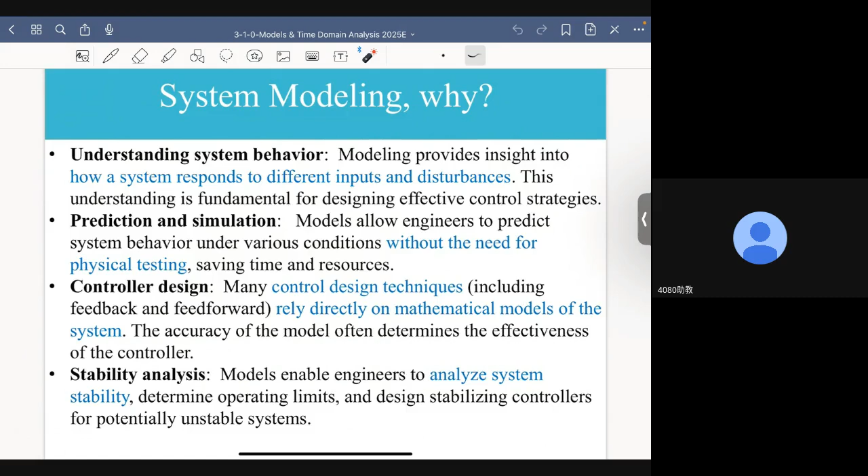The modeling process typically can be divided into 4 phases. The first phase is assumption and hypothesis. We need to make some assumptions to simplify our problem. For example, we'll assume friction is negligible.

For example, we will assume that many effects, which in reality are nonlinear, but sometimes we can reasonably assume under some operating conditions, a system can be considered to be linear. Of course, these assumptions and hypotheses need to be tested.

So once we make those assumptions, typically based on some physical laws, we can perform mathematical formulations. That is, we can set up a set of, sometimes a single, differential equations to represent the system. As we said many times, the differential equation itself represents the system.

The forcing function of the differential equation represents the input, and the solution of this differential equation represents the output. So we need to solve the differential equation. Once we have the solution of the differential equations, what we have is prediction of the output variable of the control system.

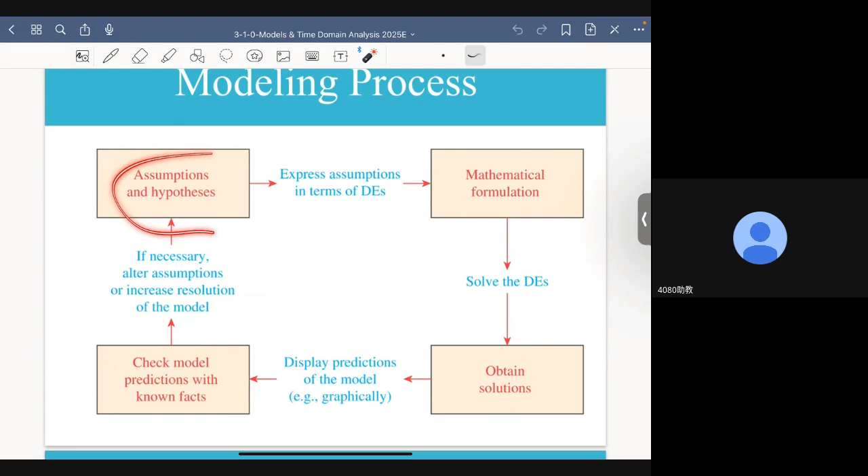Otherwise, I probably have to go back to examine my assumptions and hypotheses, and if necessary, increase resolution of the model, which means I have to add more details into the model so that my model can be more reliable and more accurate. So what is the mathematical model in this course?

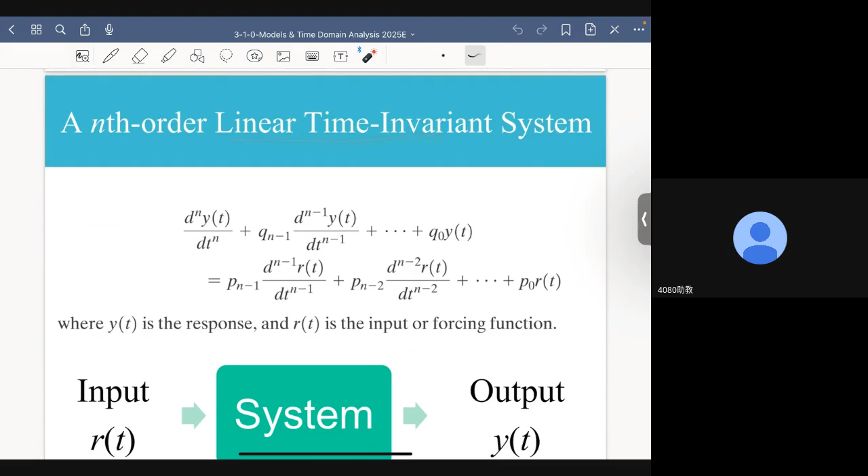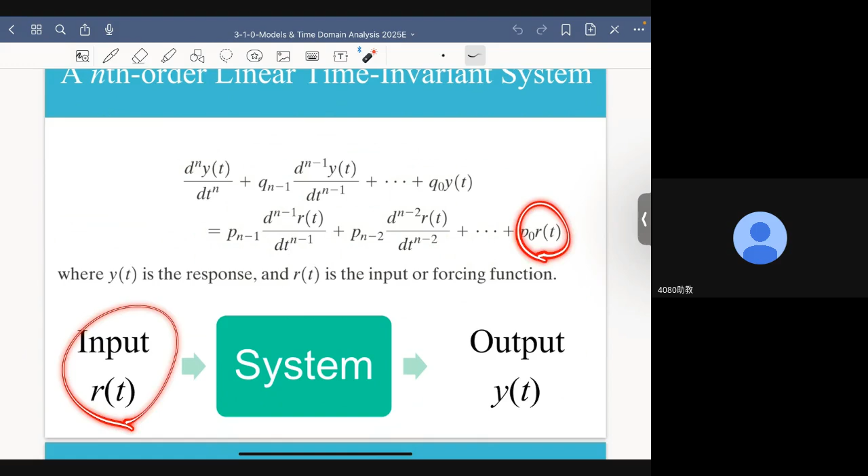As we said many times in this course, we considered nth order linear time invariant continuous time systems. Such a system can always be represented by this differential equation. These coefficients are all constants, none of them can be a function of time. If all these coefficients are constant, then this is a time invariant system. The forcing function represents the input, and the solution of the differential equation is the output.

The voltage drop across the capacitor is 1 over C times Q, where Q is the charge. And the voltage drop across the inductor is L times the derivative of the current.

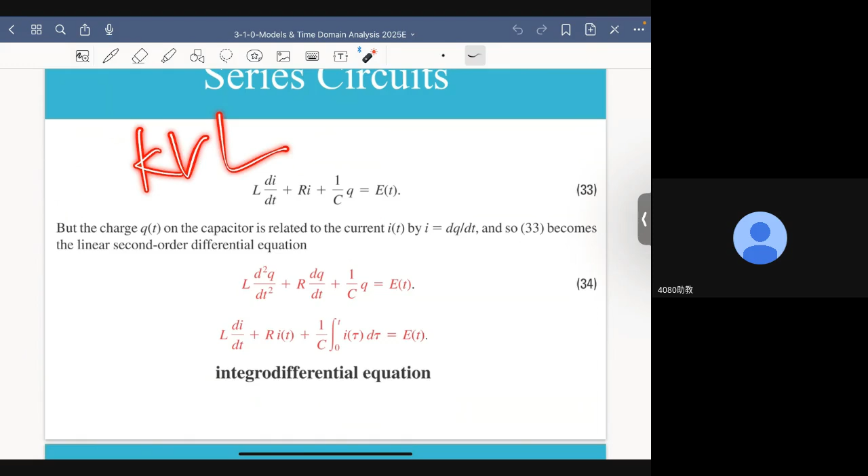Based on the KVL law, we know that this voltage source should be equal to the voltage drops across these three elements. Therefore, we have this differential equation. The problem of such a representation is that we have two dependent variables: one is I, the other is Q. We know that I is actually the derivative of Q, that is, current is the derivative of charge. So we can rewrite this equation using this equality.

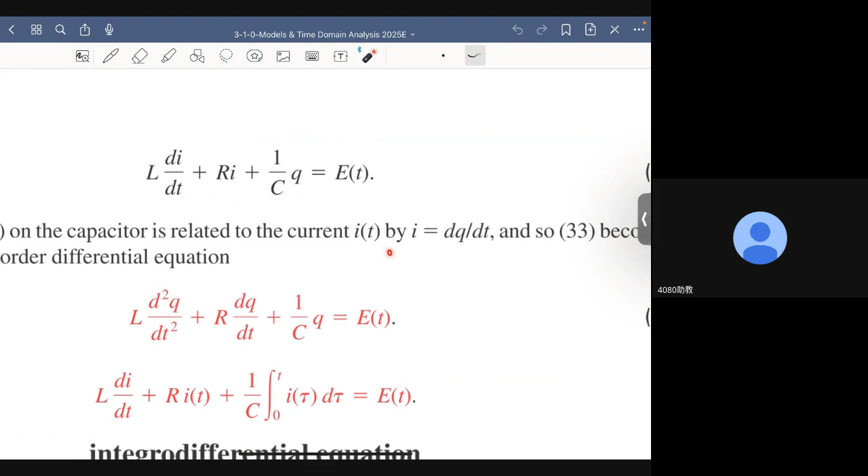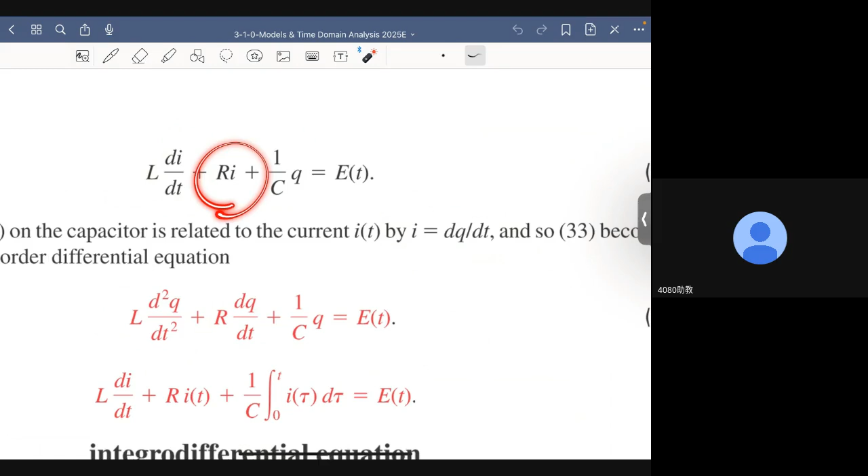For example, the derivative of the current can be rewritten as the double derivative of the charge. We can apply the same technique to rewrite this term, so Ri now becomes R times the derivative of Q. So what we have here is, of course, a second order differential equation, and it's a linear time invariant system because all these three parameters are constants.

Now, if you are not happy with this representation, that is, if you think the dependent variable should not be charge but should be the current, what you can do is replace Q by the integral of the current. And this differential equation can be written as this equality.

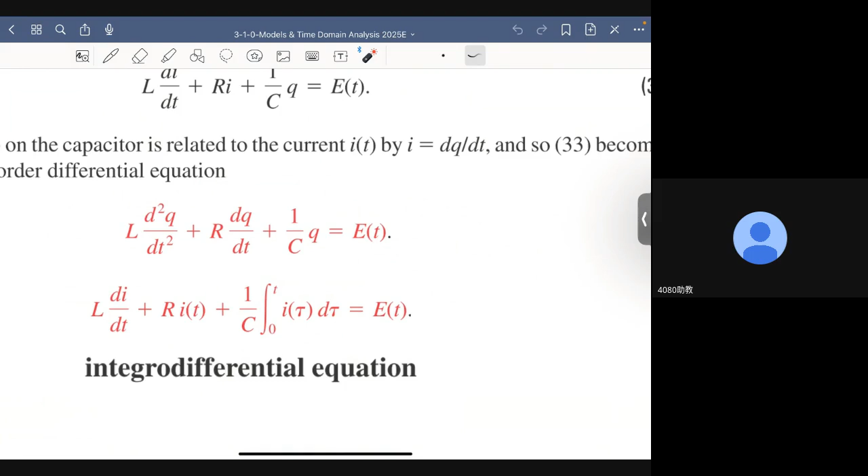The problem of this equation is that you have derivative and integral at the same time, so mathematically it's more tedious to deal with such an equation. This kind of equation, which involves derivative and integral at the same time, is referred to as an integrodifferential equation. But typically we don't want to deal with this kind of equation; we prefer a linear second order differential equation, because it is an ideal prototype for control system design.

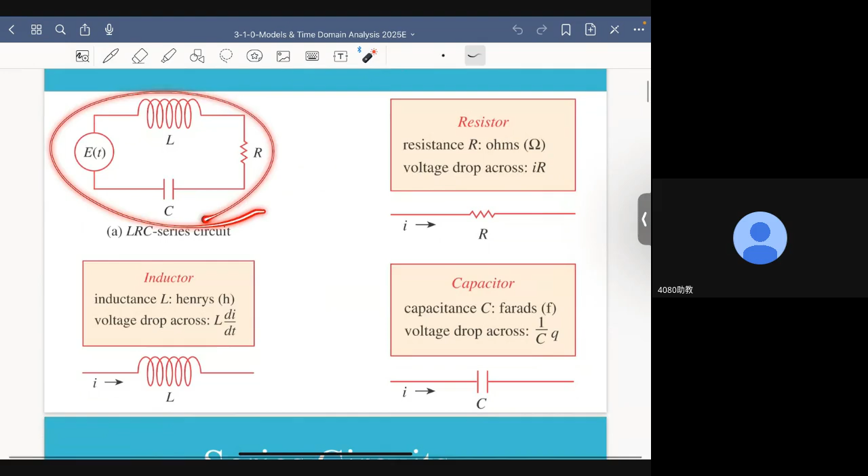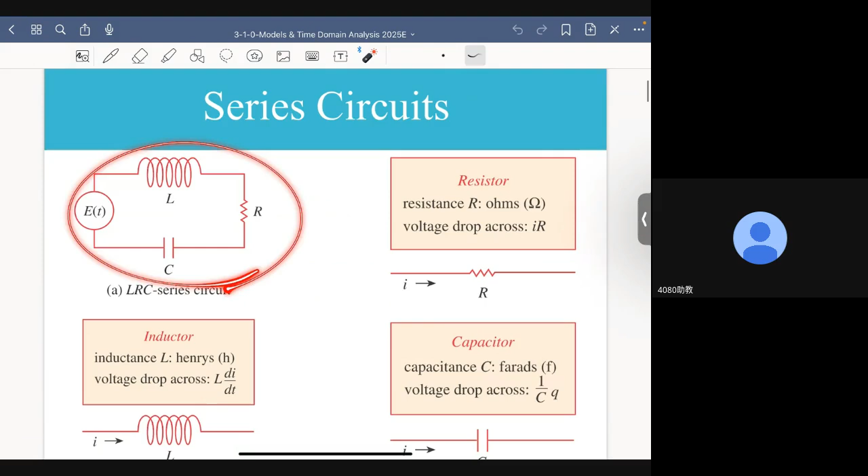Now, what we have done is for this series circuit, we set up a differential equation to represent the behavior or characterize the dynamics of this electric system. We can do pretty much the same thing for a mechanical system. What we have here is called a spring mass damper system. For example, a mechanical suspension system is made of, for each wheel, such a spring mass damper device. So to set up an equation of motion for this device, we need to use a technique.

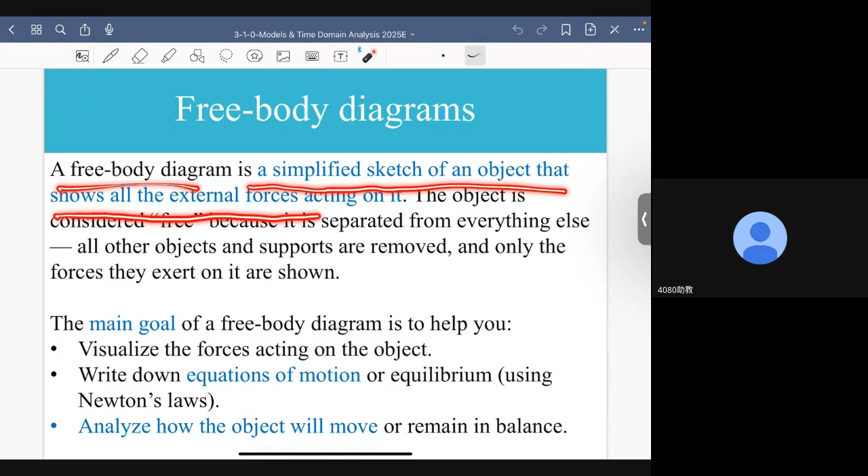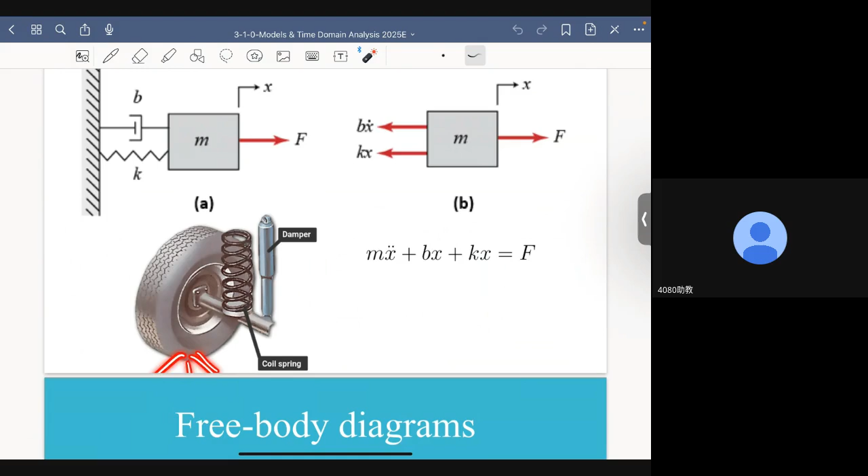The first thing we need to do is draw a free body diagram. What is a free body diagram? You learned that before, but let me review the idea again. A free body diagram is a simplified sketch of the object that shows all the external forces acting on it. So mass is the object, and what external forces do we have here? We have three external forces. The first external force is the force we apply to this mass, for example, the ground reaction force applied to the tire can be chosen as F.

Now there are two other external forces. The first is the spring force, and we know from Hooke's law that spring force is proportional to the deformation of the spring. The proportionality constant here is K, which is the stiffness or spring constant of the spring. Now the final external force is the damping force, which comes from the damper. This force is proportional to the velocity.

The spring force is proportional to the displacement of the object. By contrast, the damping force is proportional to the velocity of the mass.

For example, imagine yourself standing quietly, standing still in the sea. Without any movement, you won't feel any resistance. But once you start to move, you feel resistance from the water. And the faster you want to move, the higher the resistance. That's damping force.

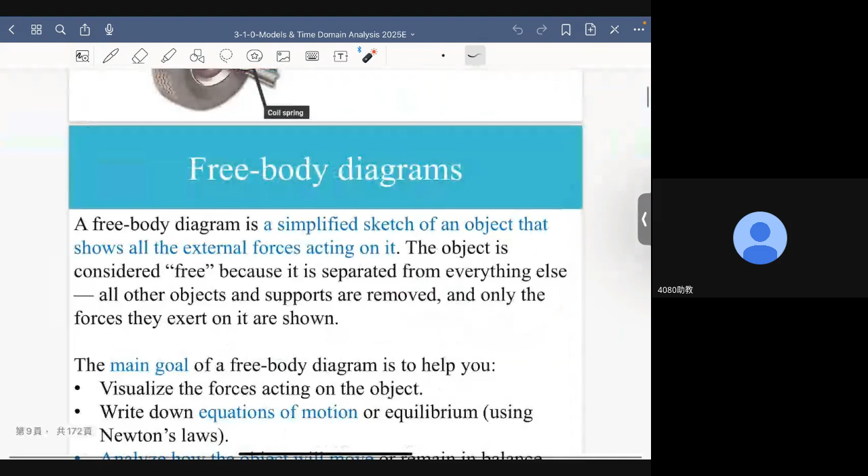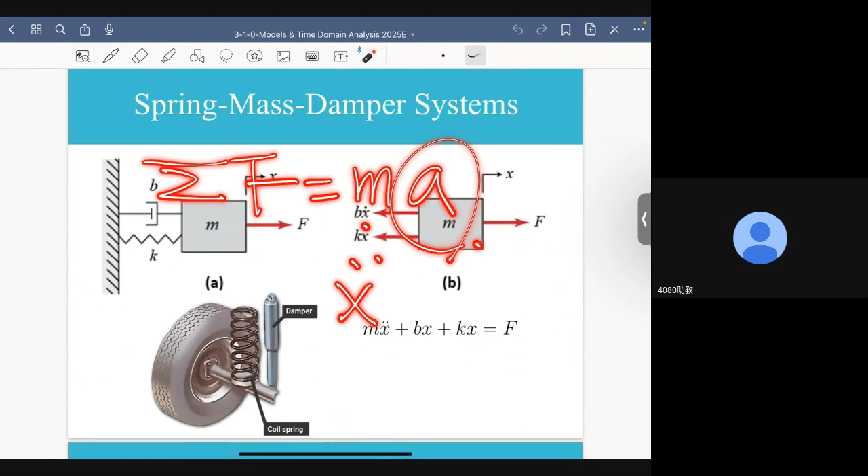So with such a free body diagram, we can use Newton mechanics to set up the equation of motion for this spring mass damper system. How do we do that? According to Newton mechanics, what we have here is summation F equal to ma. M, of course, is the mass. A is the acceleration, which can be rewritten as x double dot. And what are the forces? Of course, F minus bx dot minus kx.

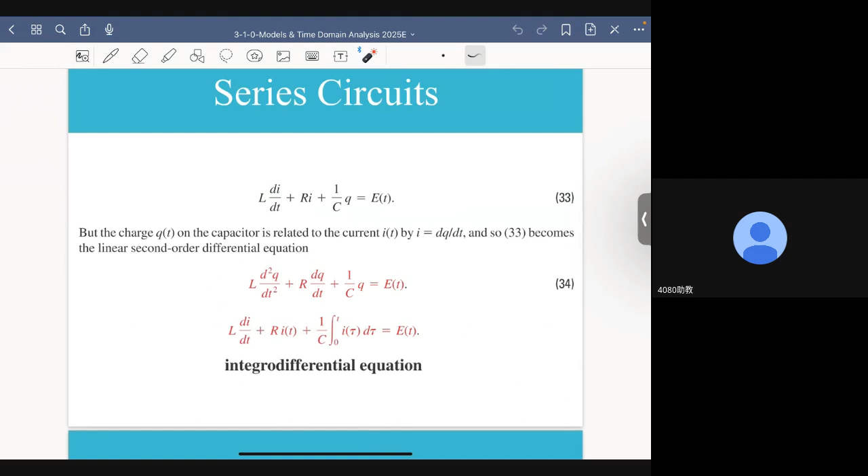By rearranging the order of these terms, we can finally come up with this equation of motion. Again, it is a second order linear time invariant system, similar to what we have here. Physically, they represent different hardware, but mathematically, they are all represented by second order linear differential equations.

So spring mass damper systems are actually very important in control, because it is fundamental in control engineering. It is the simplest dynamic model that captures essential effects of inertia, stiffness, and damping. The effect of inertia comes from the mass, stiffness comes from the spring, and damping comes from the damper. As a result, this makes it a universal prototype for many real-world systems.

If you want to study a system, probably one of the best ideas is to model it as a second-order differential equation and to understand the physical meaning of how that system performs, how the parameters correlate with the actual behavior. You can think of that second order system as a spring mass damper system, and consider its behavior in terms of inertia, stiffness, and damping, because these three terms all have very straightforward, easy to understand physical meanings.

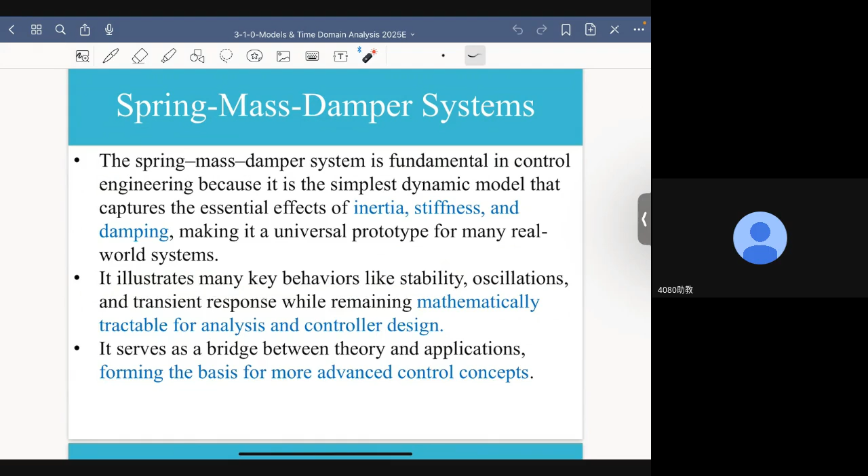In the course of engineering mathematics, we have already learned a bunch of mathematical techniques that tell us how to solve those equations, how to deal with them. So second order systems such as spring mass damper systems are mathematically tractable, so it's relatively easy to study by maths. Therefore, it serves as a bridge between theory and application, forming the basis for more advanced control concepts.

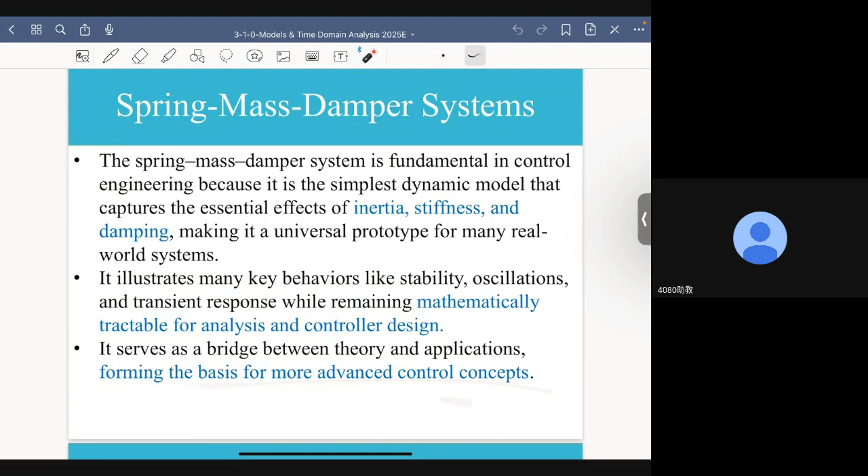That is, in the real world, there are many systems which are much more complicated than a spring mass damper system. For example, a spring mass damper system, as we already know, is a second order system. You may have to deal with higher order systems, but even under those circumstances, second order systems still represent the basis for dealing with those advanced control systems.

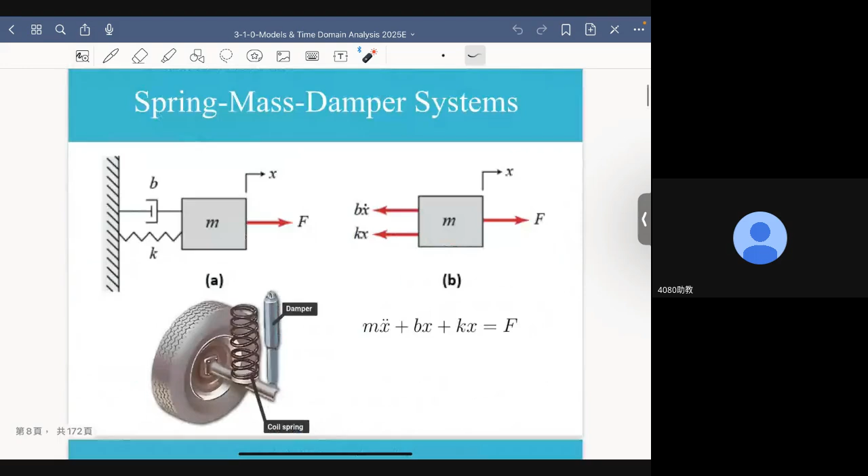Now, here I want to introduce an idea called analogous systems. This is a series circuit, and this is the spring mass system we just talked about. Both of them can be represented by second order differential equations, so they are therefore analogous systems, because analogous systems refer to systems from different physical domains. For example, from the electric domain or from the mechanical domain. It can also come from thermal or fluid systems. Although they come from different physical domains, they exhibit mathematically similar behaviors. Physics different, but in terms of maths, they are basically the same.

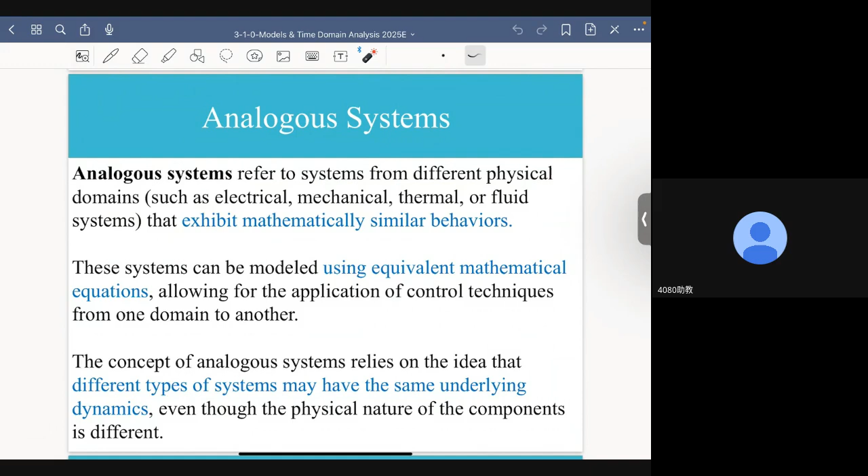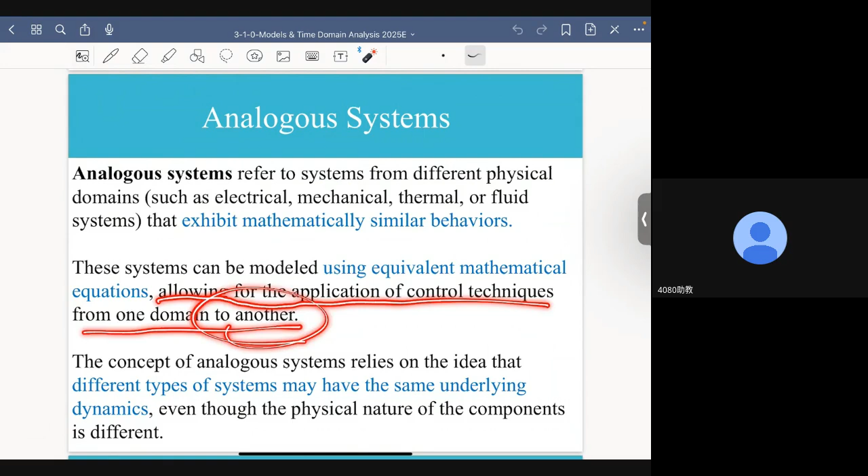If that is the case, we can call them analogous systems. This system can be modeled using equivalent mathematical equations, therefore allowing for the application of control techniques from one domain to the other. For example, if you want to perform experimental studies for these two systems, conducting studies for this system is much more complex than performing an experiment with such a simple circuit. Putting a series circuit together, I wouldn't say is a piece of cake, but it's really not that difficult, because all these elements are easily commercially available.

Connecting these elements together is also not a big deal. You can use simple devices to measure the current, the voltage drops of this circuit. But performing experiments for this system is much more complex because it involves mechanical elements, and you need expensive, sophisticated sensors to measure acceleration, velocity, and displacement. So it's not an easy job.

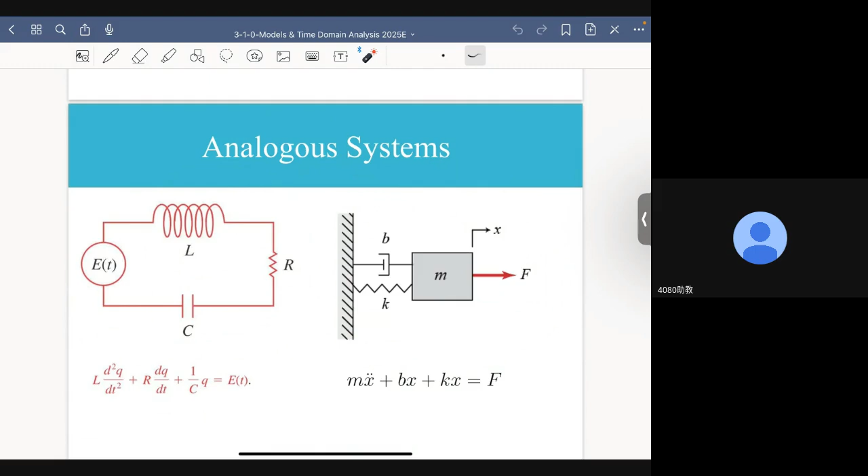But if they are identical in the sense of mathematics—let's say if you pick the right elements—then the differential equation of this model can be identical to the differential equation of that model. Then any experimental results obtained from this model can be applied to this system. Why? Because although they are physically different, they are mathematically equivalent. That's the idea of analogous systems.

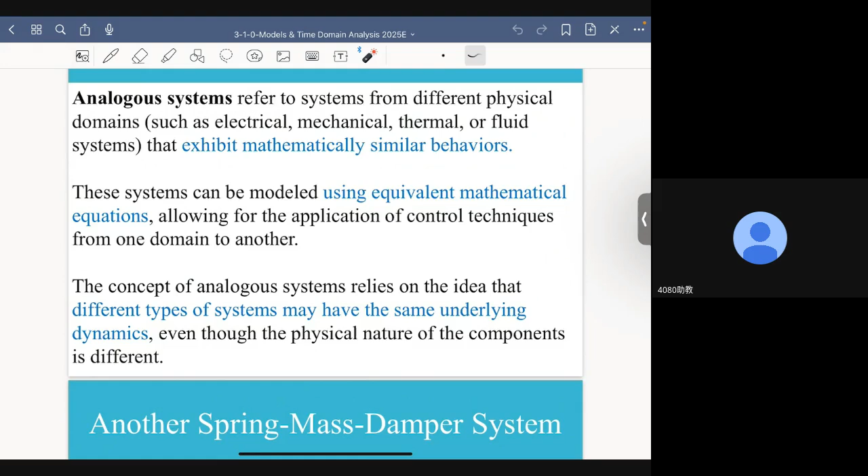Because they have equivalent mathematical equations, the concept of analogous systems relies on the idea that different types of systems may have the same underlying dynamics. Therefore, the result from one system can be readily generalized to another system, as long as these two systems are analogous. Let me give you another spring mass damper system.

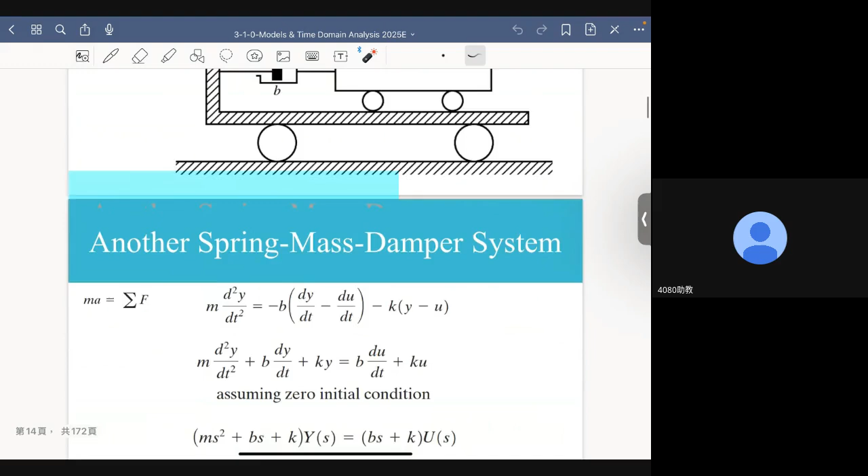Here we have a spring mass damper system we saw before, but now they are attached to the wall of a moving cart. I assume it is a massless cart, so the mass of this cart can be ignored. Now, by drawing a free body diagram of this mass, and by applying Newton's mechanics, I have these equalities.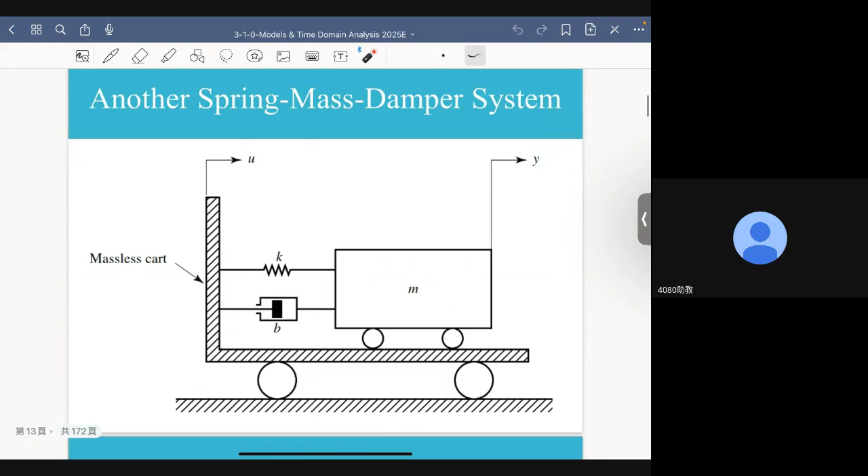This represents ma, and this represents the damping force, which is proportional to the velocity. Here the velocity is not the absolute velocity of this mass, but the relative velocity between this cart and this mass. Similarly, the deformation of the spring is actually the difference between y and u. Therefore, the spring force is not minus ky, but minus k times the difference between y and u.

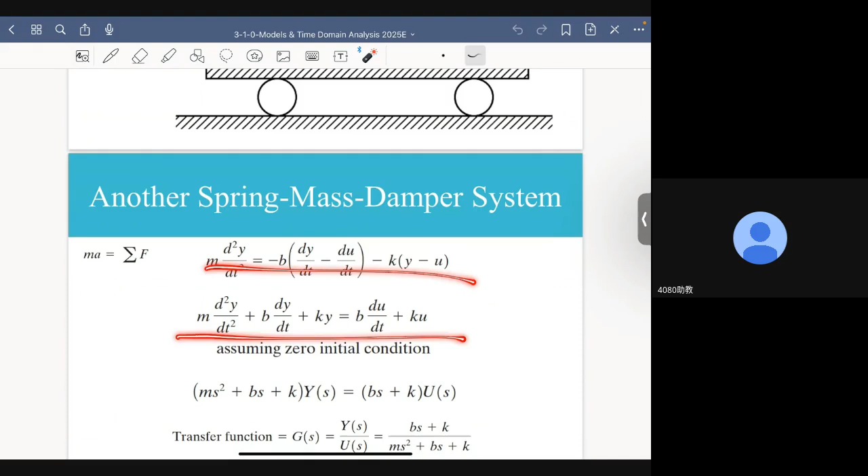By rearranging terms of this equation, we can have this equality. And by taking the Laplace transform of this differential equation, and at the same time assuming zero initial conditions, we can have these algebra equations. I hope this conversion looks very natural to you—it won't be something that looks totally strange to you.

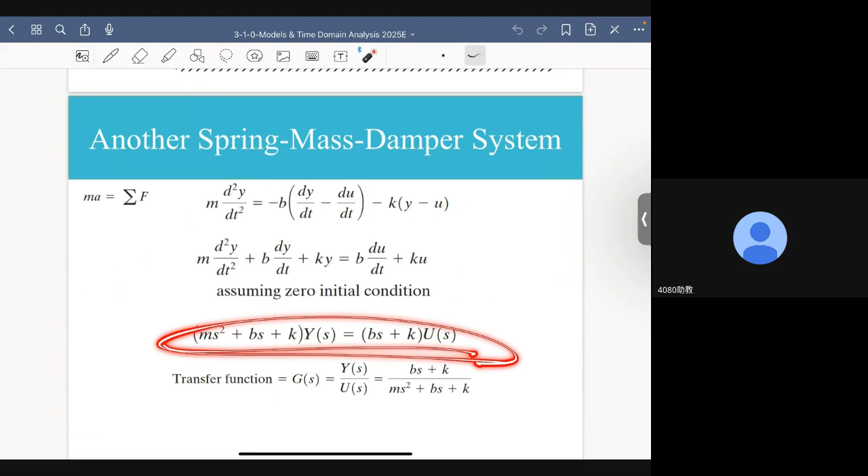But remember that here, we have to assume all the initial conditions are zero. If that is true, then we have these algebra equations in the S domain, and we can set up a transfer function for this model. Transfer function is defined as the Laplace transform of the output to the Laplace transform of the input. From this equality, it can be easily shown that this transfer function, the ratio of y to u, is the ratio of bs plus k to ms squared plus bs plus k.

Now, since this is a second order system, the characteristic equation is a second order polynomial. Therefore, this system will have two poles, because a second order polynomial always has two roots. Each root corresponds to a single pole.

Now I want to review what we talked about before for the S domain system analysis. Remember that in this course, we're considering a causal LTI, ordinary differential equation—that is, a linear time invariant system, which can be represented by this differential equation. Here, the input is no longer R, but another symbol, X. I apologize for the inconsistency of the notations, because my materials come from different sources, and different sources use different notations.

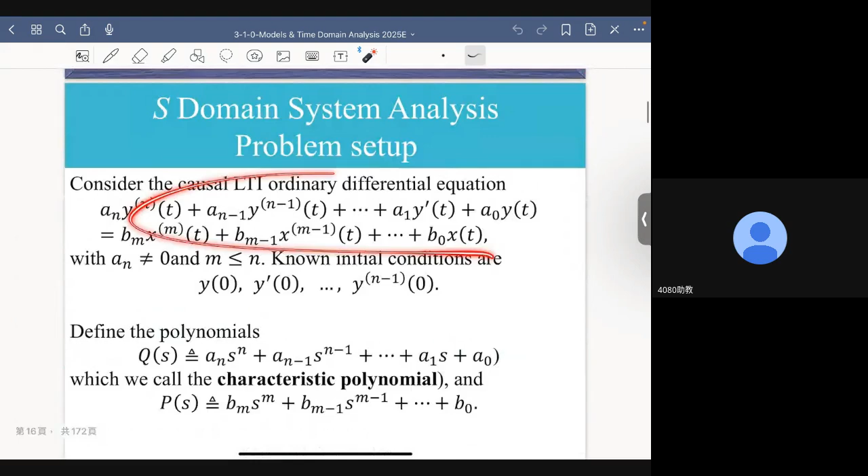What we need to do next is take the Laplace transform of this differential equation based on this equality of Laplace transform, which involves two parts. The first part is s to the k times Y of s. And the second part involves initial values of y.

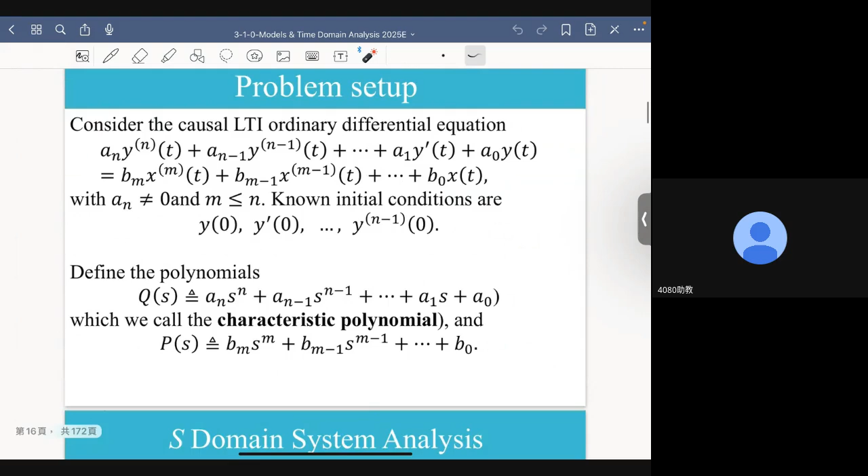It can be shown that by using this equality, taking this to transform this differential equation into the S domain via Laplace transform, we get this result. Solving for y gives us this equality. This is what we call the zero-state response, and this is the zero-input response. And h of s is, of course, the transfer function, because it represents the ratio of y to x.

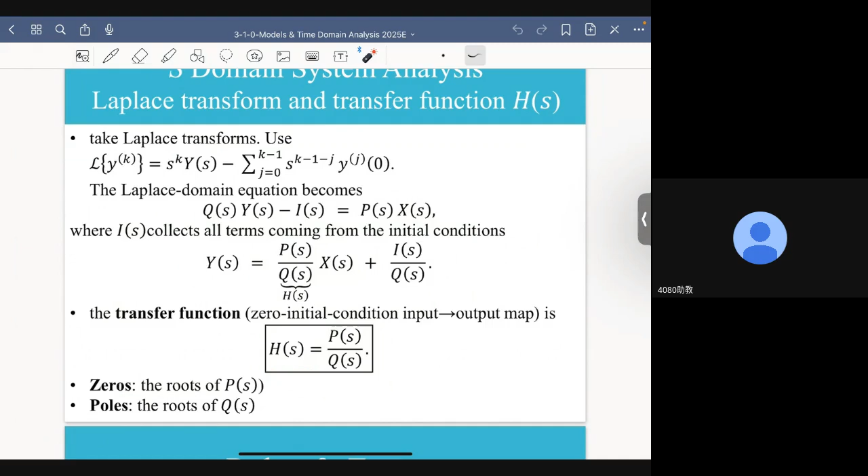Remember that the roots of p of s, the numerator of the transfer function, are the zeros of the system. Similarly, the roots of the denominator of the transfer function are called the poles of the system. Now, one thing is clear: the locations of the poles and zeros matters.

They are important parameters of the systems. So in the later part of this course, we will introduce the impacts of the location of the poles and zeros on various aspects of system performance. But here, let's just show you how to identify the locations on the S complex plane.

Let's say the transfer function is this. The system we are considering has such a transfer function. Apparently it has two poles: one located at -1, one at -2. And the zero is located at the point -3.

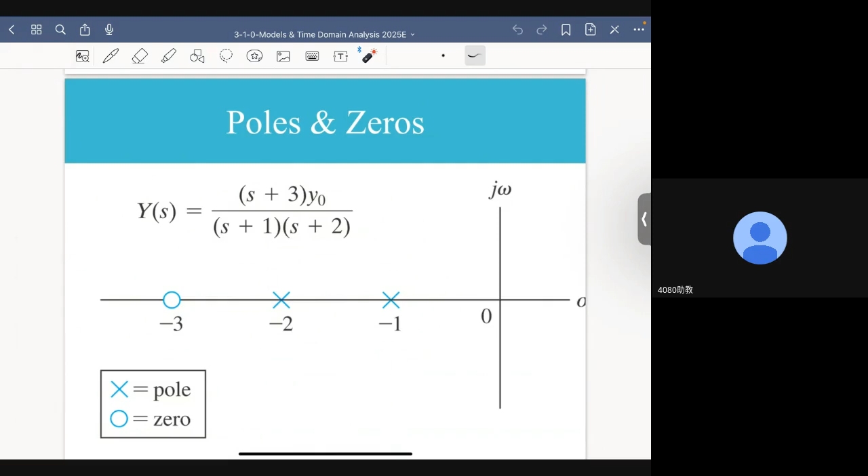Typically we represent poles by a cross sign, and we represent zeros by circles. So this is a simple graph to help us understand the absolute and relative locations of poles and zeros, and we will see this kind of graph in the future again and again.

Now in this slide I want to re-emphasize the significance of transfer function. Remember that in the beginning of today's lecture we told you that the goal of this part of the course is about mathematical models. Transfer function actually is the mathematical model of the system, although it is presented in the S domain.

In analysis of linear time invariant systems, the transfer function is our most powerful tool for understanding system dynamic behavior without having to solve the underlying differential equation. Because all we need to do is deal with algebraic equations such as the characteristic equations, we don't have to mess around with differential equations anymore as long as we are in the S domain, after the application of Laplace transform.

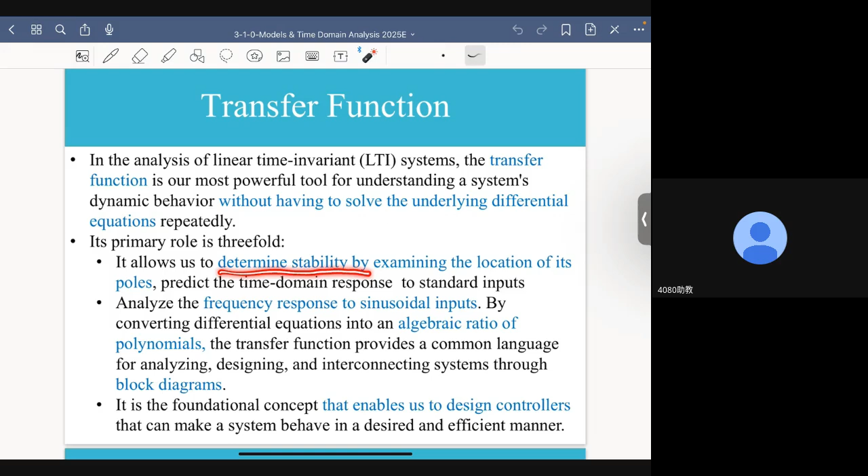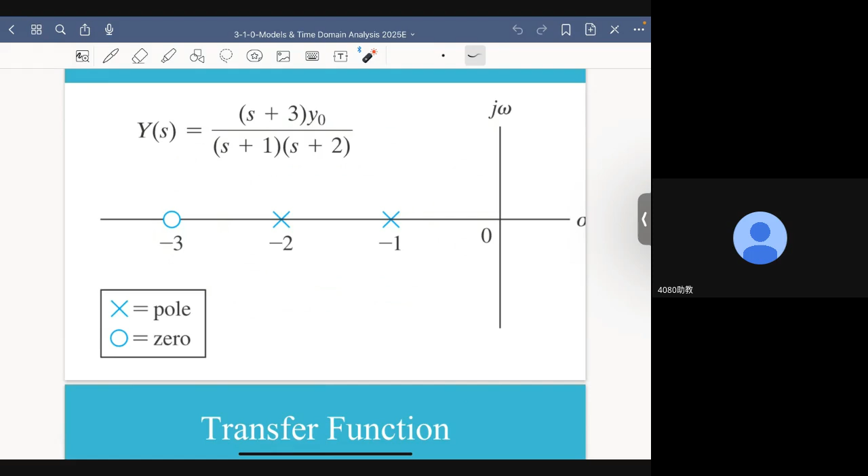So with transfer function, it allows us to determine stability by examining the location of its poles. Because in terms of asymptotic stability, what we need is all the poles placed in the left half plane of the s complex plane.

With the transfer function model, we can analyze the frequency response of the system. Now, it is too early to talk about frequency response, but right now I just want you to have an idea that transfer function is vital. It is very good for frequency domain analysis.

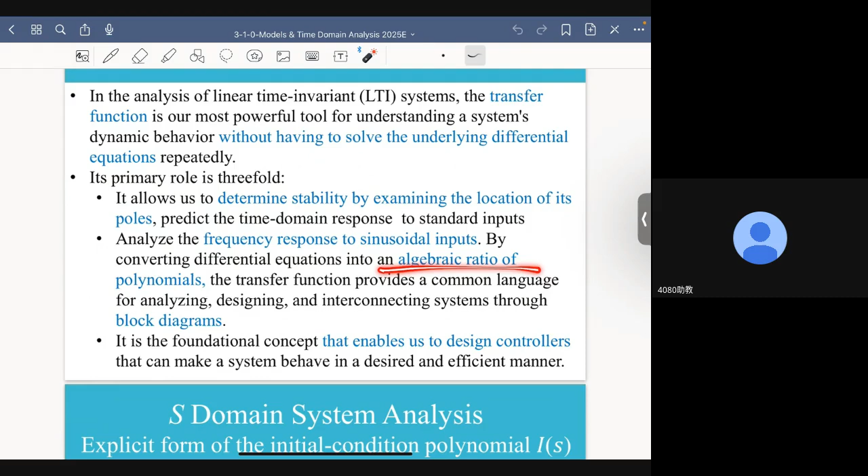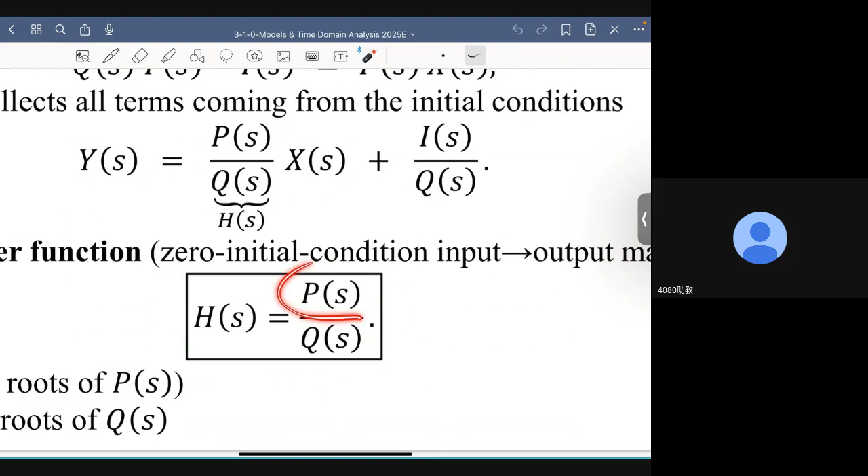Now remember that transfer function is actually an algebraic ratio of polynomials. Why? Because it equals P of s over Q of s. P of s is a polynomial, Q of s is also a polynomial. Therefore, transfer function is an algebraic ratio of polynomials.

Now, based on that idea, the transfer function provides a common language for analyzing, designing, and interconnecting systems through block diagrams. That is, in the later part of this course, we will interconnect many systems in different ways, and we will build a block diagram to represent a system made of many subsystems.

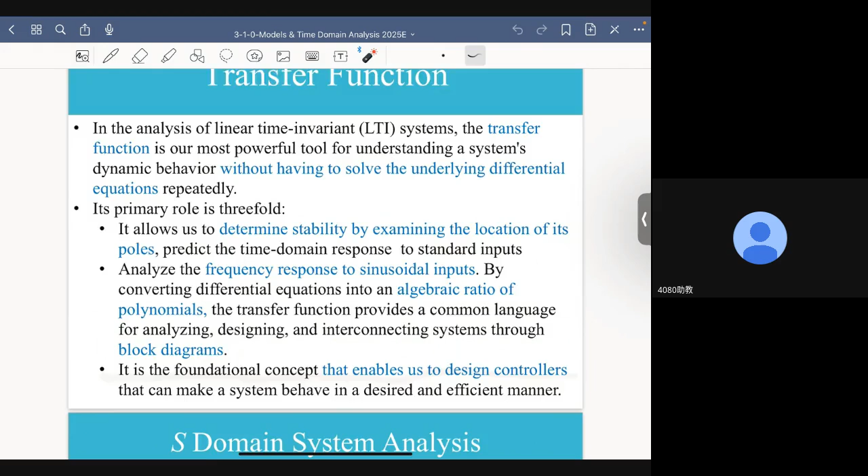And each of those subsystems can be represented by its own transfer function. Block diagram analysis is only possible when we have a transfer function model for each of those subsystems. So transfer function is the foundation concept that enables us to design controllers. That is why transfer function is very important.

Now, in addition to transfer function, which is related to the zero-state response, we also have to deal with the impacts of the initial conditions. Remember that the output actually consists of two parts. The second part represents the contribution of the initial condition.

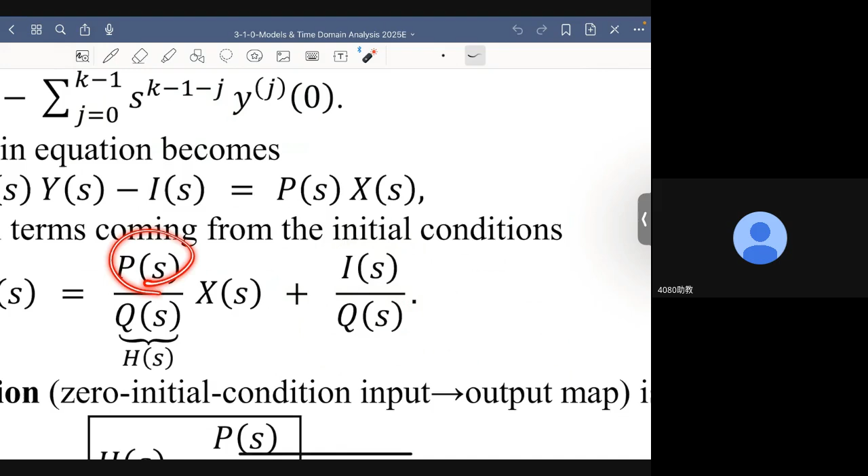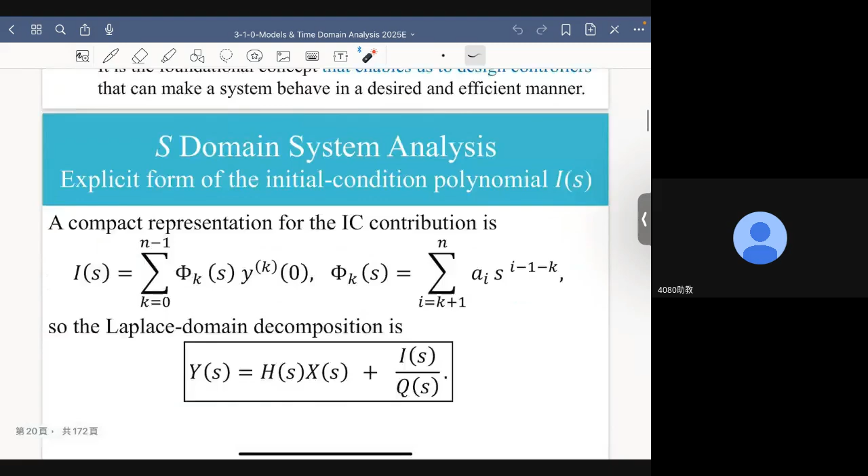And for this part, again, we see a ratio: a ratio of I of s, which is also a polynomial, to the characteristic equation. We already know what P of s is, we also know what Q of s is, both of them are well defined. What is I of s? It can be shown that I of s actually comes from the initial conditions.

Now it can also be shown that I of s can be represented by this equality, where phi of k is defined here. You can always determine phi of k for every k, because all these coefficients of A are known—they are given here. So overall, we should be able to determine I of s without any difficulty.

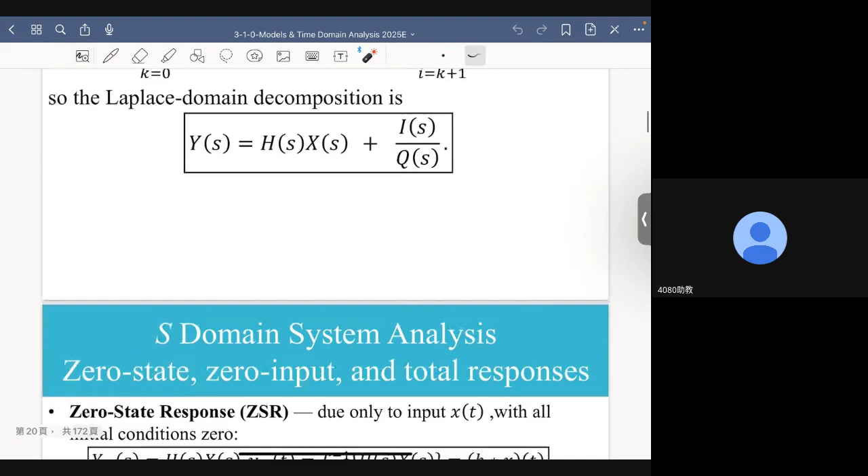So finally, we can have the total response in the s domain. As I've said again and again, it consists of two parts. The first part is the zero-state response, which is this part.

Now we need to perform inverse Laplace transform in order to examine the zero-state response in the time domain, because it is in the time domain that things are really happening. So let's take the inverse Laplace transform of the product of h and x. What we will have is a convolution integral of h and x. X, of course, is the input. This h represents the impulse response of the system, because it is simply the inverse Laplace transform of the transfer function.

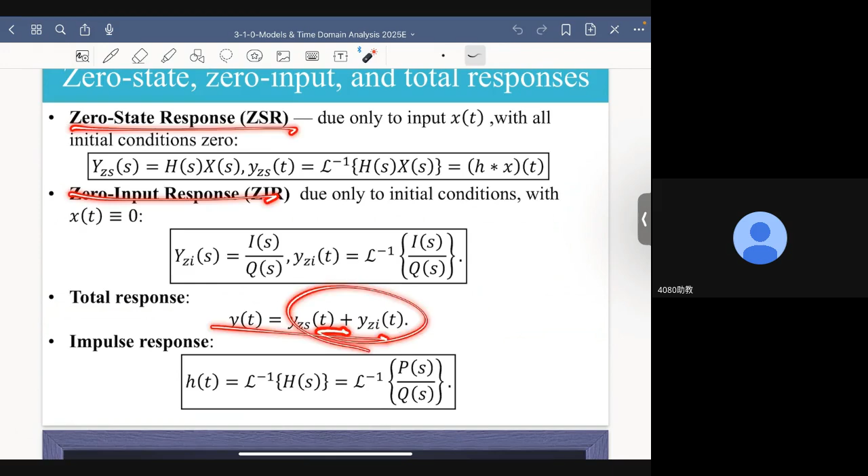And the zero input response, we can also take the inverse Laplace transform. Now the total response is, of course, the sum of the zero-state response and the zero input response. Now the impulse response, as I just described, is the inverse Laplace transform of the transfer function, and therefore it is the inverse Laplace transform of the ratio of P of s to Q of s.

That's just a review of how we use Laplace transform methods to determine the total response, impulse response, zero-state response, and zero input response of a linear time invariant system. Why do I want to review this concept? Because I want you to learn them by heart—I want you to remember the concept behind all these responses, because they are physically very important.

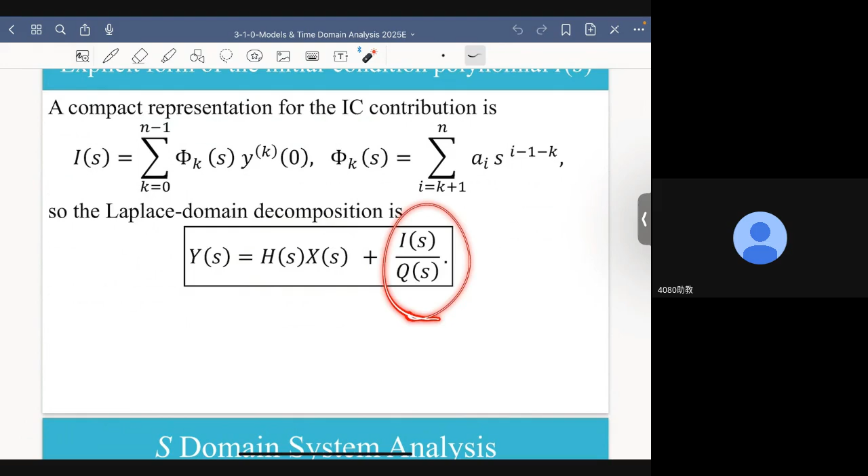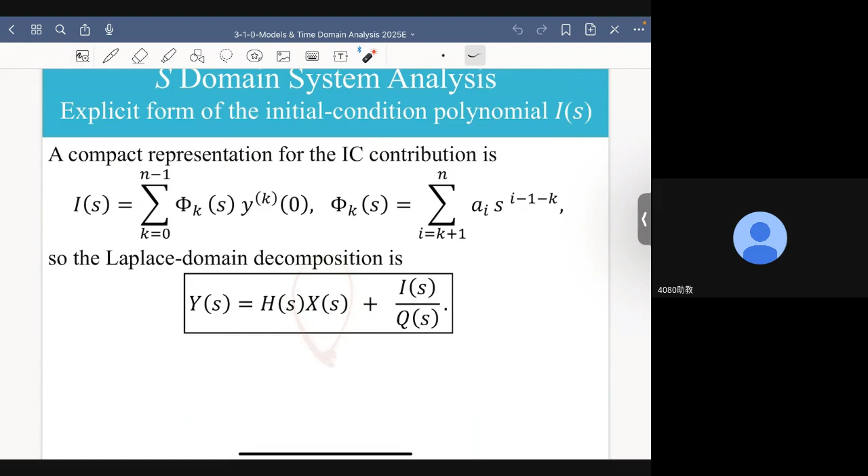For example, in controller design, what we deal with, the focus is always on this part, because this part comes from the initial conditions, and our input cannot do anything about it. We just have to accept them as they are—there's no way to get around it. But what we can do is plan for the best input, and hopefully, by using a good control strategy, we can come out with a good zero-state response.

And this part of the response—it can be shown that for a stable system, or an asymptotically stable system, this part will eventually disappear. It will converge, it will die out naturally. So in the end, that is in steady state, this will take total control, because this will always go away as long as the system is asymptotically stable.

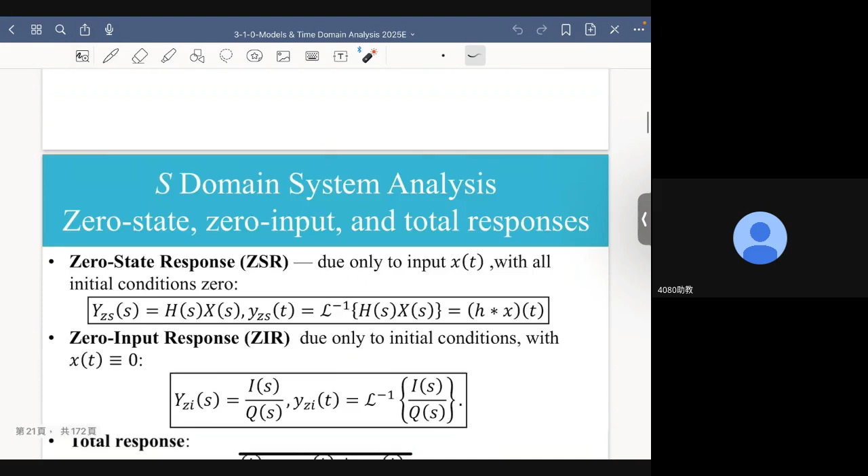Now let me introduce a term called DC gain, which is often mentioned in the process of controller design. In control systems, DC refers to the steady state gain of the system where the input is a constant. That is, let's say this is a linear time invariant system represented by a transfer function, and let's say the input is nothing but 1—that is, a unit step input.

Now, when time goes to infinity, let's say the steady state value of the output is A. Then the DC gain of this system is A over 1, or simply A, because DC gain is defined as the steady state gain of a system when the input is a constant. Therefore, it tells you how much the output will settle to in response to a constant input after all transients have died out.

So mathematically, its formal definition is that for a linear time invariant system with transfer function h of s, which is equal to y of s over x of s—y again is the output, x again is the input—the DC gain can be shown to actually be h of 0, and therefore it is the ratio of y of 0 and x of 0. I will not be able to explain where this equality comes from, because to prove this equality is true, I need to use some frequency domain analysis methods, which we are still unfamiliar with.

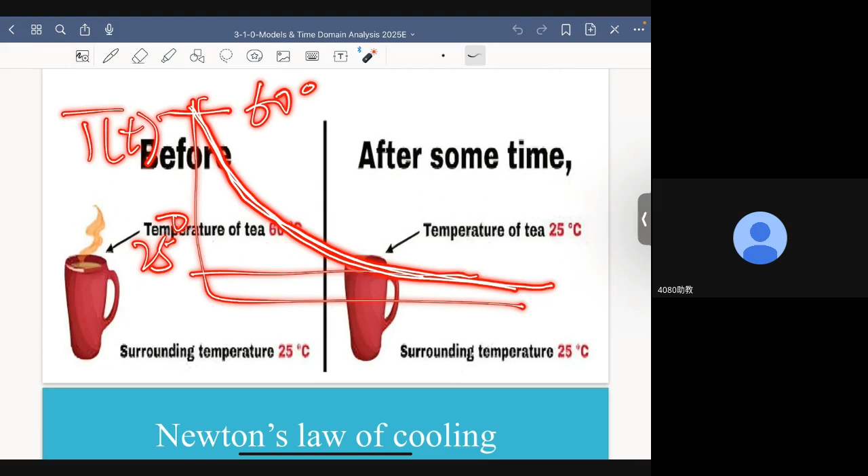But how do I go from here to here? For example, how does the temperature profile look like as time progresses? We know that initially it is 60, and eventually it is 25, but what is the shape of this profile? How fast is this profile? What determines the shape and speed of that profile?

Newton's cooling law tells us several things. The first is that the rate of heat loss of a body is proportional to the temperature difference between the body and its surrounding. So the larger the temperature difference—meaning the difference between the temperature of the tea and the surrounding temperature—the higher the rate of heat loss. This seems very natural.

However, we have to make two assumptions. Remember, before setting up a mathematical model for a physical system, we have to make assumptions. The first assumption is that the surrounding temperature remains constant—always 25 degrees. This might not be true, because weather changes all the time.

Heat transfer is primarily through convection. There are three different types of heat transfer, and convection is only one of them. We also have conduction and radiation, which are also possible means for heat loss. But we assume in this case that heat loss due to radiation and conduction is negligible, which again may not be true, but generally it is reasonable.

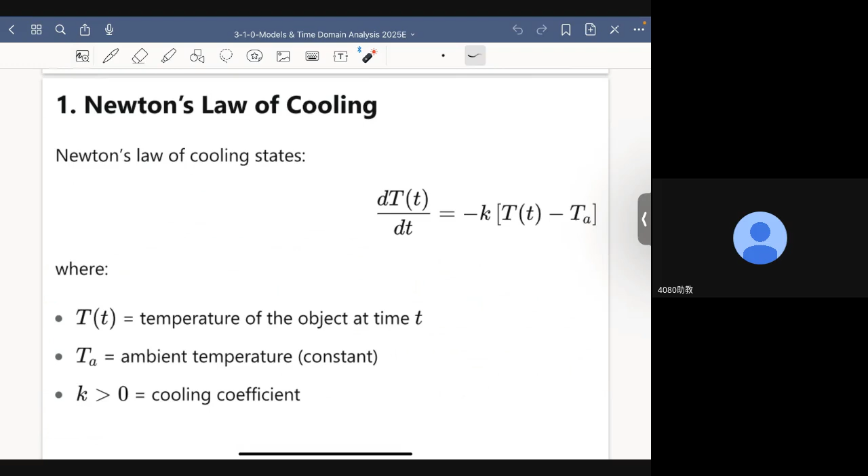With such assumptions, based on Newton's law of cooling, we can now set up a differential equation for this phenomenon of heat loss, or the temperature variation of the tea. Newton's law of cooling tells us this has to be true, where T, capital T, and small t is of course the time. Capital T represents the temperature of the object at time t, which in this case is the temperature of the tea.

TA represents the ambient temperature, which is what we call the temperature of the surrounding environment, and we assume it is constant. K is the cooling coefficient, and it is always larger than zero. So the rate of heat loss is the derivative of the temperature, and this is, of course, the temperature difference between the tea and the surrounding.

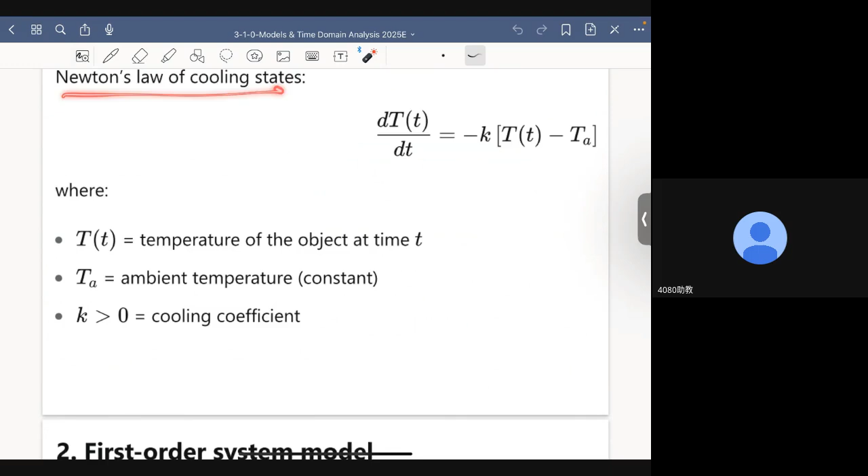So with this differential equation coming from Newton's law of cooling, let's define the output as Y. I want to set up a first order control system to model this phenomenon. So my output variable is chosen as the temperature of the tea, and the input is, of course, the surrounding temperature.